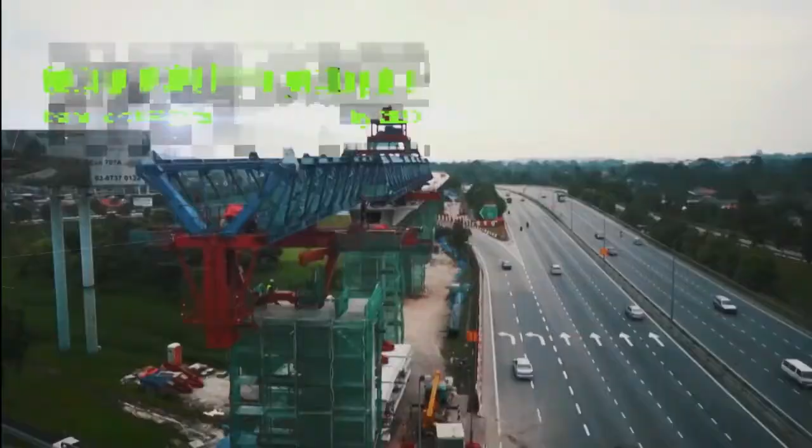Beyond connecting citizens and visitors in the Klang Valley region, Malaysia's Mass Rapid Transit Corporation, or MRTC, is helping transform Kuala Lumpur into a green city.

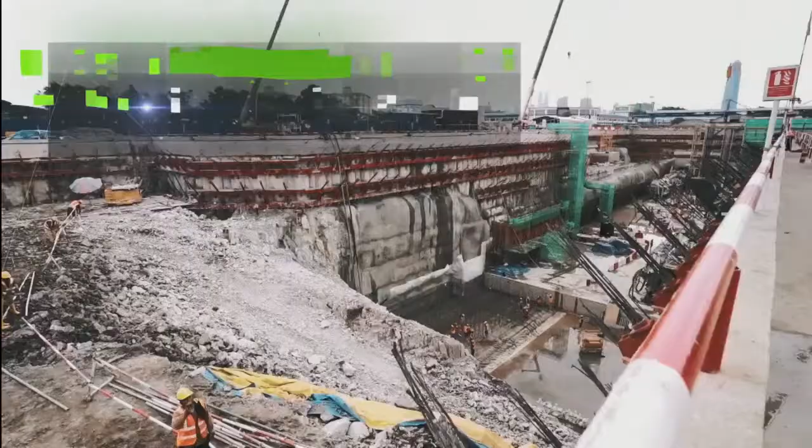Construction of its Klang Valley Mass Rapid Transit project will contribute to a rail-based public transport network within the capital city, as well as new sustainable park and ride facilities and public amenities. The KV MRT system is providing a major boost in the integration and efficiency of urban public transport.

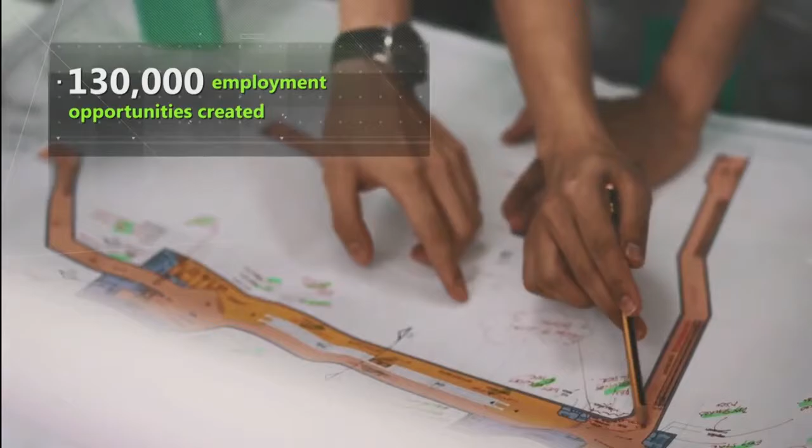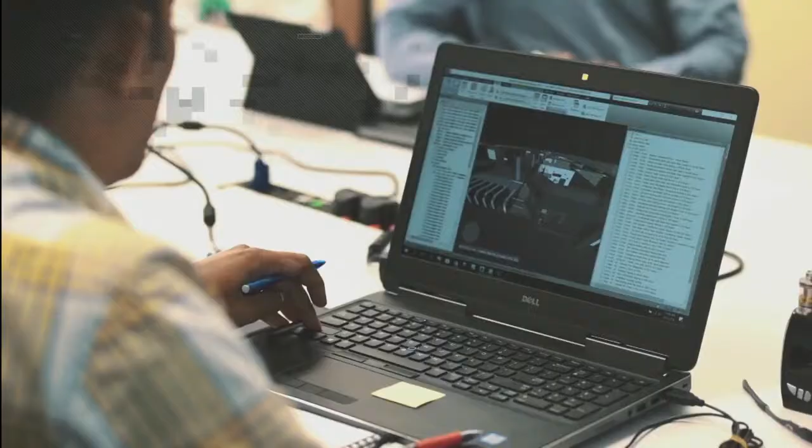The country's largest infrastructure project is already having a significant economic impact in Malaysia and within the region. As the first metro project in Asia Pacific to ensure greater collaboration and efficiency across teams with building information modelling, or BIM methodologies, the SSP line is expected to be delivered on schedule and on budget.

Taking advantage of digital technologies for its SSP line, MRTC is improving connectivity for local and regional businesses, expanding workforce skills, attracting international investment, and increasing property values across the Klang Valley region. Digital transformation is helping transform the lives of millions of Malaysians today in preparation for a better tomorrow.

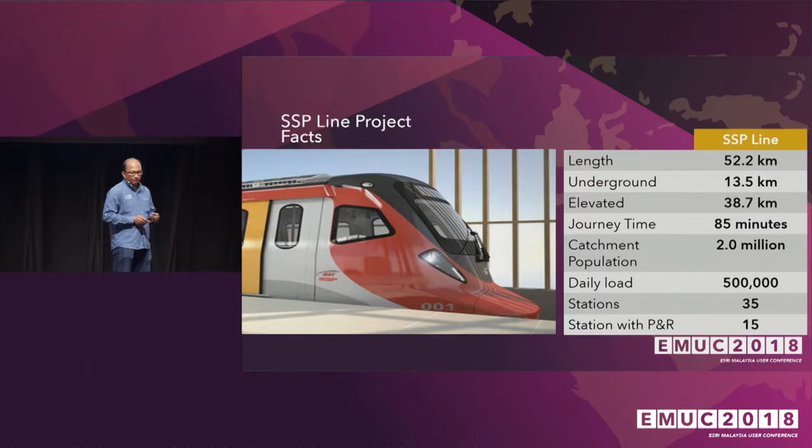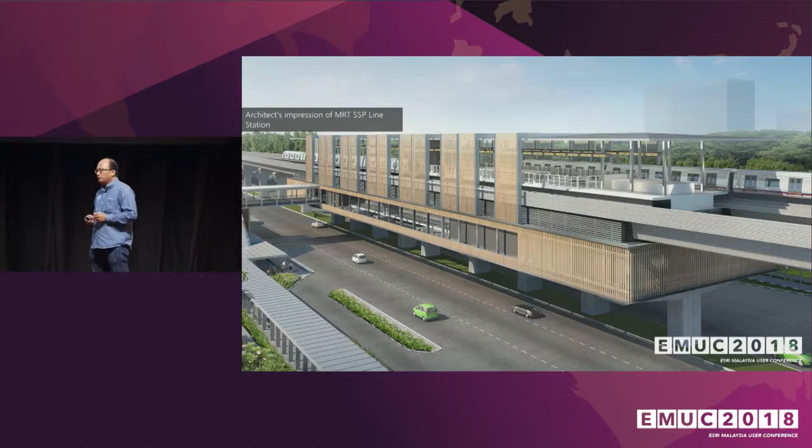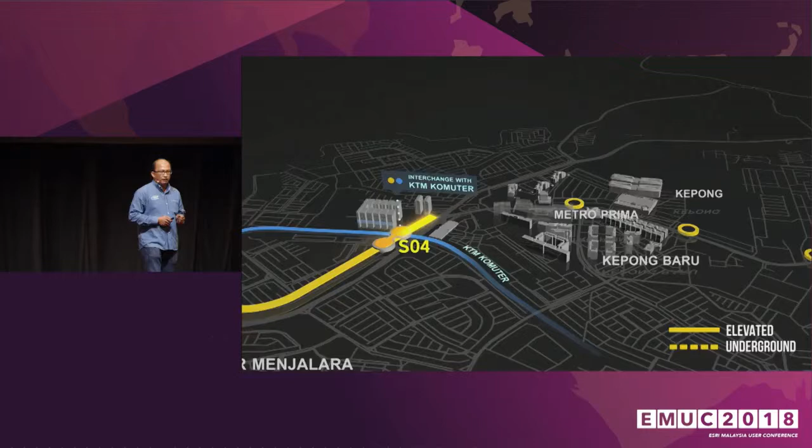The SSP line will start from the existing Sungai Buloh depot and pass through residential areas in the northwest of Klang Valley, including Damansara Damai, Kepong, Jinjang, and Jalan Ipoh.

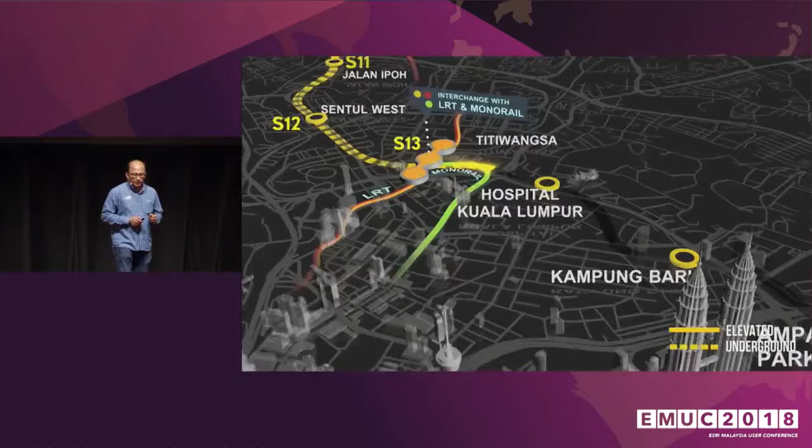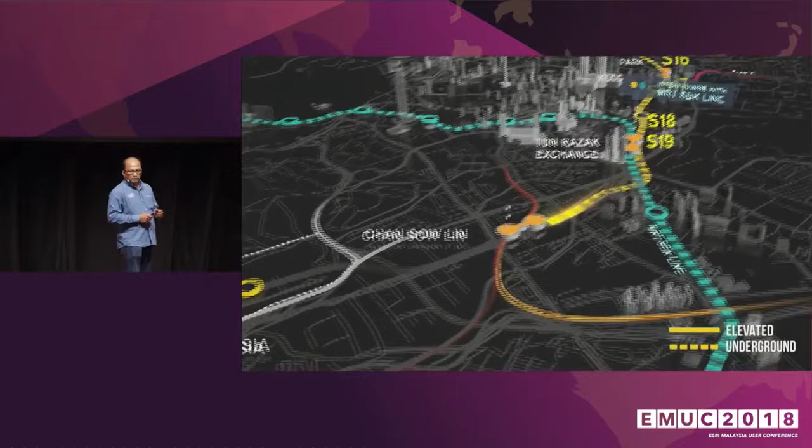Once it reaches the city center, the train will go underground starting from Sentul West, going to Titiwangsa, Kampung Baru, Ampang Park, KLCC, Tun Razak Exchange, Chan Sow Lin, and back to the elevated alignment at Desa Waterpark.

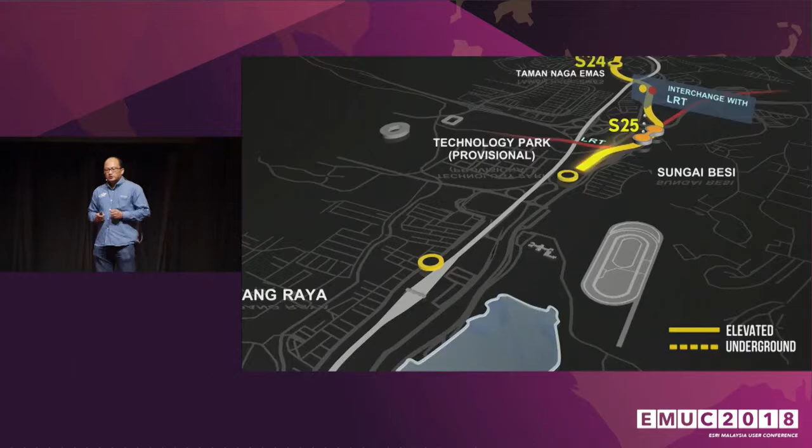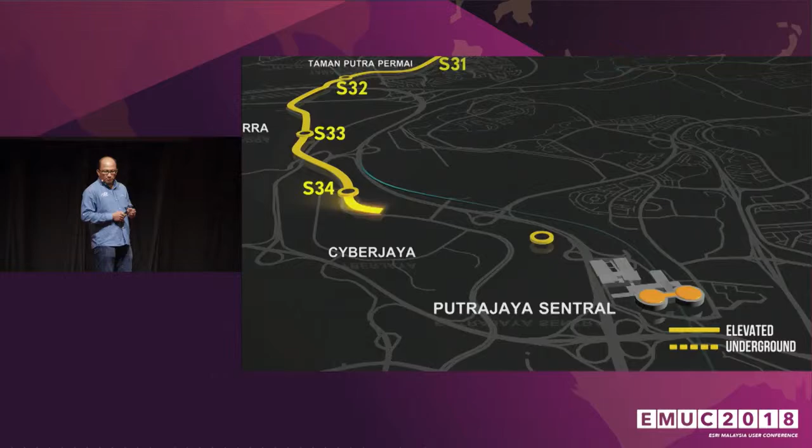Near Jalan Kuchai Lama, the line will continue toward the southeast of Klang Valley, passing through residential areas such as Kuchai Lama, Sungai Besi, UPM, Serdang, our second depot at Serdang, before Equine Park, 16 Sierra, Cyberjaya, before terminating at Putrajaya Sentral.

The project has reached 40% progress of the underground construction and 30% of the elevated system. The operation of the SSP line will be in two phases. Phase 1, from Sungai Buloh station to Kampung Batu station, will begin operation in the second quarter of 2021, while the rest, from Kampung Batu station to Putrajaya Sentral, will be operated under phase 2 in the second quarter of 2022.

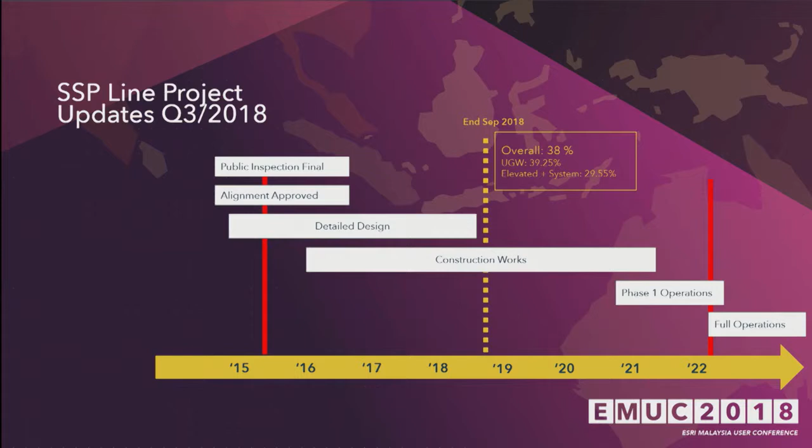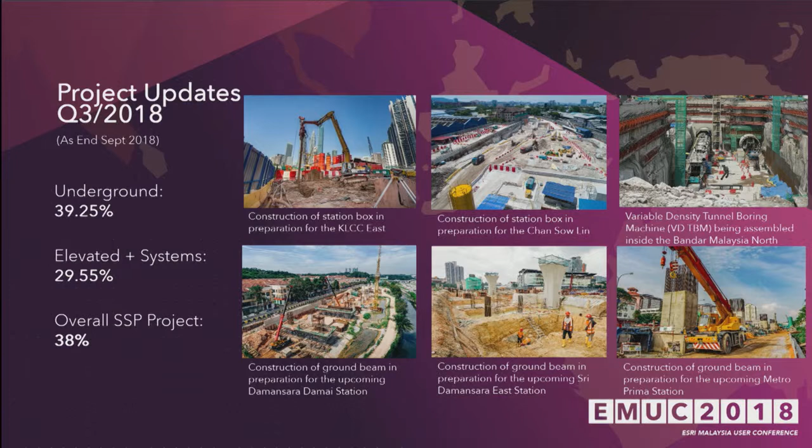These are some photographs of our construction progress. You can see we are currently constructing the MRT station near KLCC, Chan Sow Lin, and our tunnel boring machine launch site at Bandar Malaysia North, as well as some elevated stations at Damansara Damai, Damansara East, and Metro Prima area.

Now, I would like to share some of the project challenges we have in this project. The MRT SSP line consists of 500 multidisciplinary professionals like architects, engineers, planners, geologists, and controllers, and these people are the heart of the MRT SSP line project. We are responsible for delivering the SSP line project within budget and within time to the government of Malaysia.

Our work involved in the design and the construction of the SSP line underground, elevated guideways, depot, tunnels, and station, as well as the electrical and mechanical system required for a fully functional railway system.

It is very important for us to make the information available across the project accurately, up to date, and with no misinterpretation between the stakeholders. We need to ensure the design information, as-built information, and as-built validation are being managed and kept within the project, as the MRT structures and station will have a long lifespan, which is 120 years.

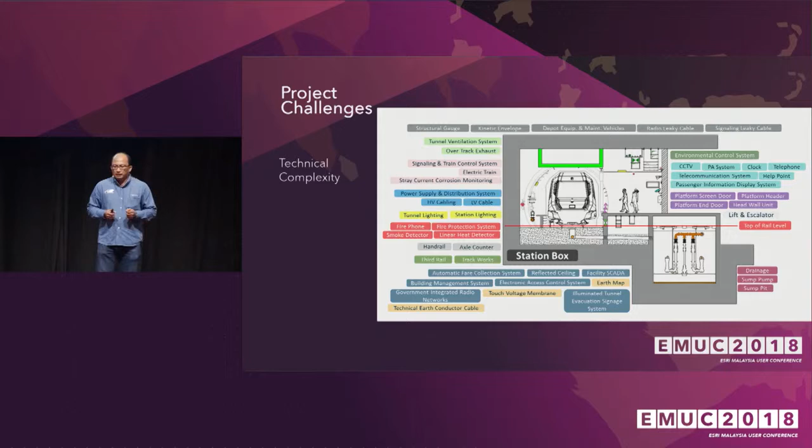Next is the technical complexity of the design. This illustration shows how complex it is to design and construct the MRT station. This involves cross-functional and multidisciplinary fields within a tight schedule. The engineering design information needs to be organized in a systematic and structured way so that it is easy to retrieve. The attributes also need to be updated correctly according to project classification requirements.

To overcome these challenges, MRT Corp has embarked on a digital transformation program for engineering design and construction for this project.

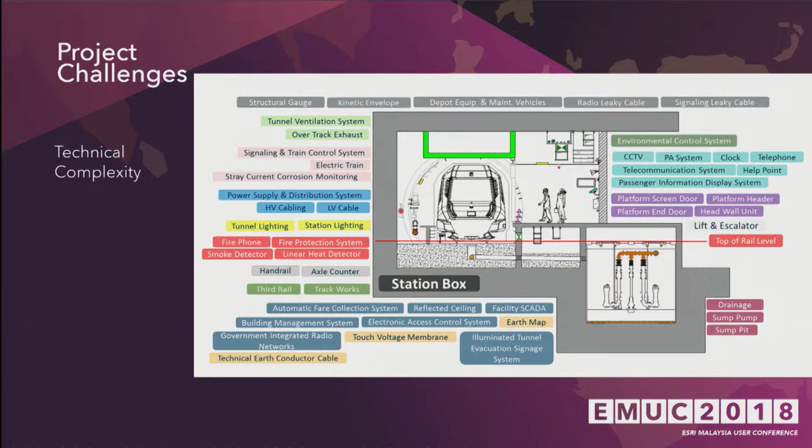The main objective of our digital engineering program is to improve the SSP line project productivity by 35%. In order for us to achieve this, we are pushing 6 digital engineering initiatives into our project.

We are mandating the use of BIM Level 2 framework for our underground and system work package contractor to carry out design process in the Common Data Environment, or CDE, following BS 1192 standard.

We developed a GIS web portal to host all design and engineering information, utilities, as-built and construction models. We also utilize reality models using drones for site progress and monitoring, and we are using 3D laser scanning for BIM model validation and as-built scanning.

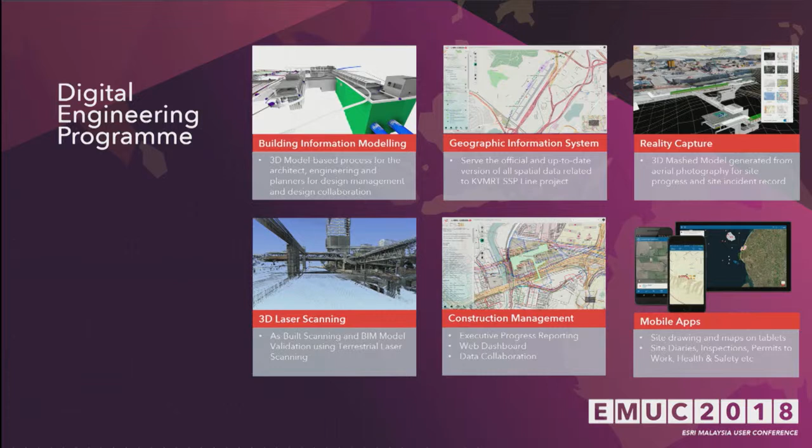Together with our contractor, we are pushing construction management towards going paperless, mainly for inspection, dashboard reporting, and progress updates using smart apps. Next, I would like to showcase some of our work on how we have applied digital engineering in the design and construction of the MRT-SSP Line project.

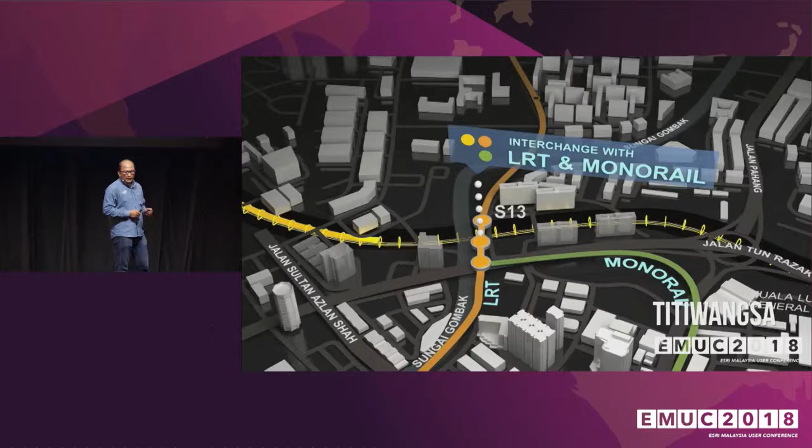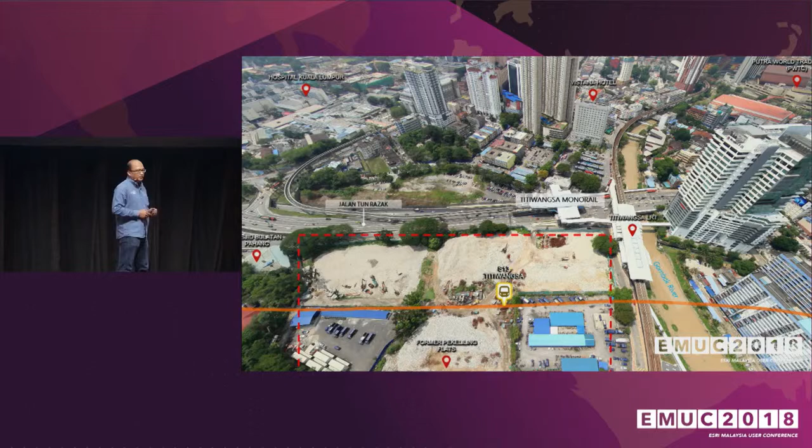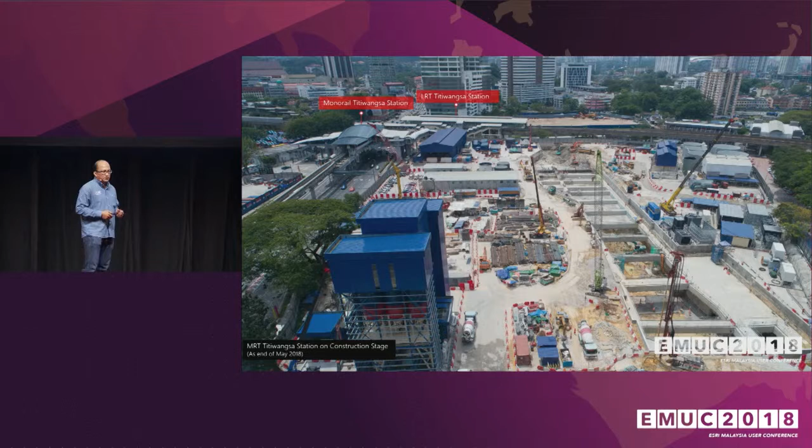For this demo, we have picked MRT Titiwangsa Station, which is one of our favorite stations. The MRT station is located beside Jalan Tun Razak, near the existing LRT Titiwangsa Station and KL Monorail Titiwangsa Station. The MRT station is intended to be an interchange station that will be integrated seamlessly with the Ampang Line and KL Monorail Line.

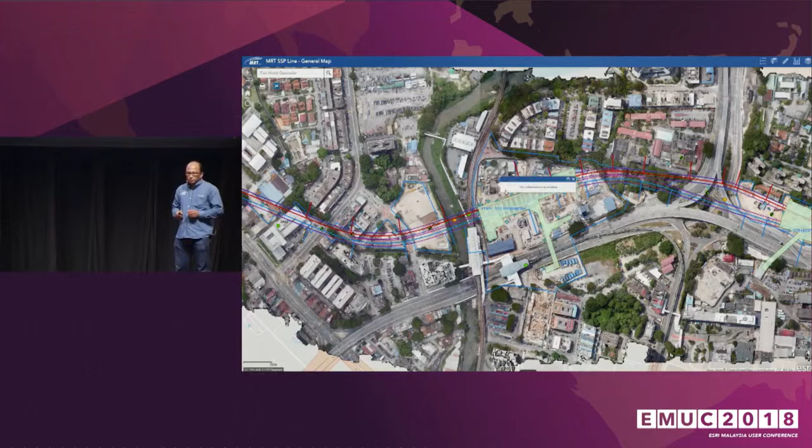Now, let's have a look at the GIS implementation in the MRT-SSP Line project. For this project, our geospatial portal is using ArcGIS Enterprise 10.5. We are currently compiling all engineering drawings, spatial information, documents and records into a centralized mapping viewer.

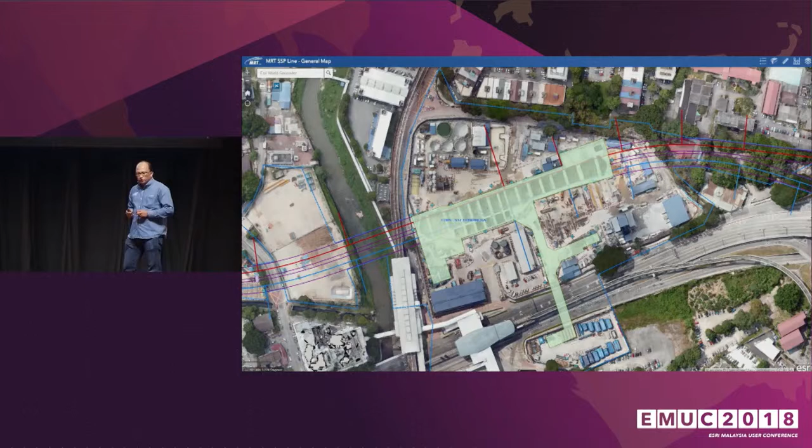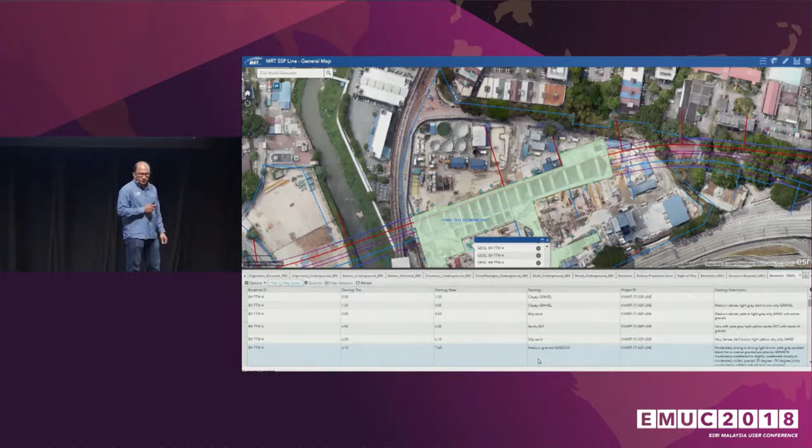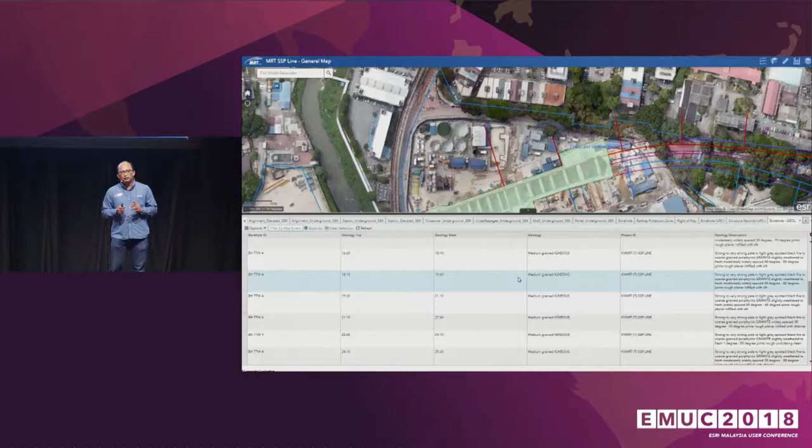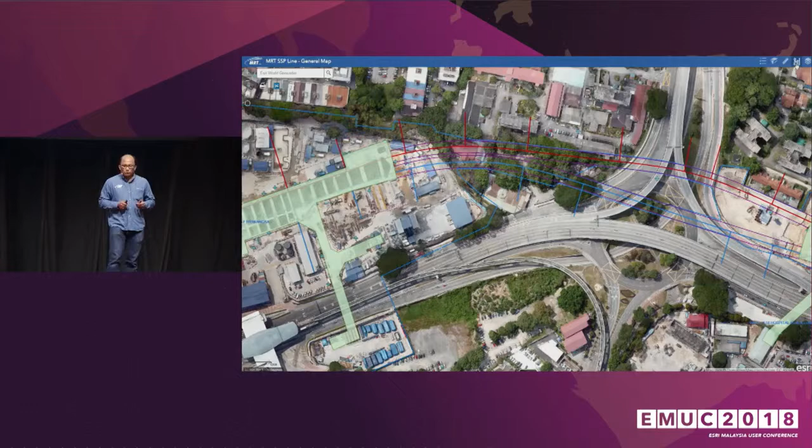The video shows a collection of soil investigation boreholes that we have converted from AGS4 format from our geotechnical team. The AGS4 is a text-based format and it contains detailed information about soil profile. In order for us to bring this data into a GIS portal, a special conversion tool has been developed. Now our geotechnical engineers have the ability to see the borehole report together with the visual representation.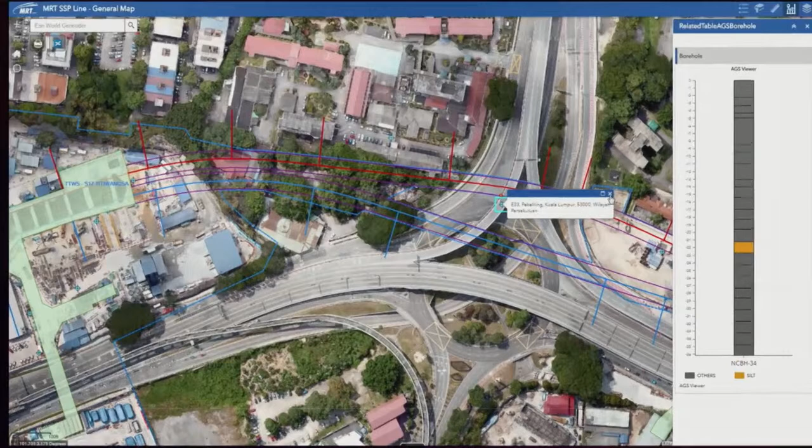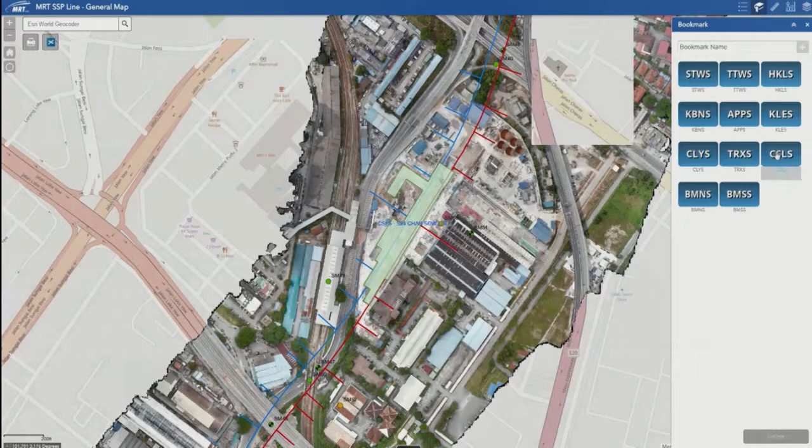We also create a widget to highlight the depth and the soil type of each borehole. It will provide a graphical representation of the soil depth. Here is the video of a few boreholes in the customized widget viewer that highlights the soil profile and the soil depth in the ArcGIS portal.

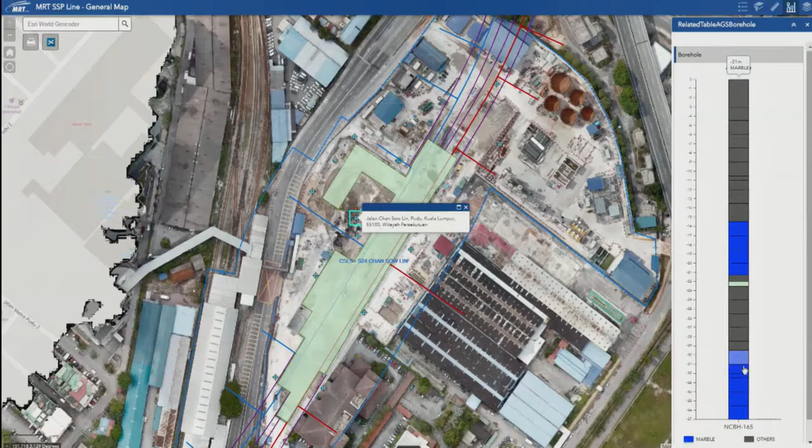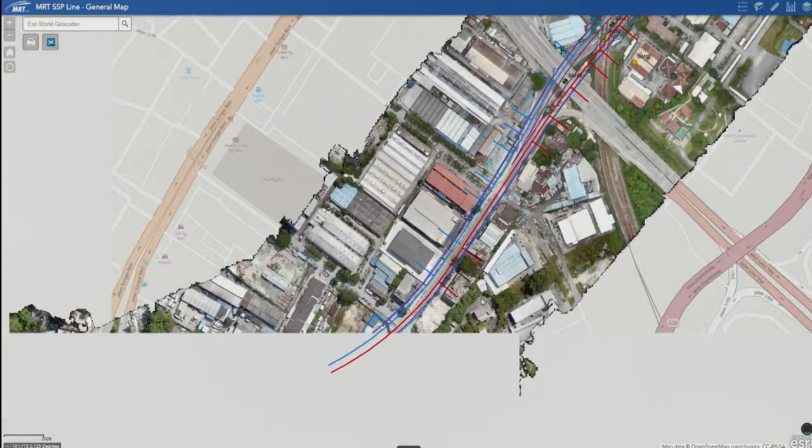In addition to the compilation and presentation of the geotechnical data, we also created an API to interface with Maxwell Geosystems tunneling software. The purpose of this API is to map the tunnel progress every day in the GIS portal. So you can see here, information like tunnel position and ring progress are being tracked daily in the GIS system.

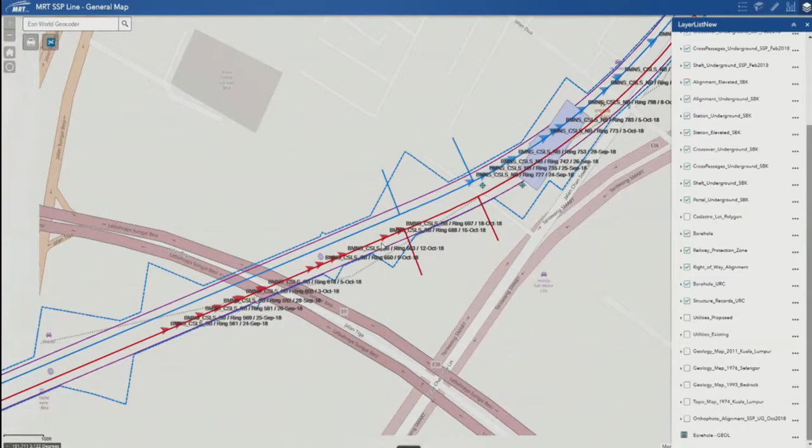For this project, MRT Corp has moved from on-premise server to cloud-based server implementation, which provides better reliability and availability of all our project data. We are adopting Microsoft Azure Cloud for both GIS production and development servers. These servers are fully interfaced with KVMRT CDE, and we are also replicating both servers in cloud and on-premise to backup and protect our project data.

We are also proud to share that we are the first project in the Asia region to have ArcGIS Server Enterprise on full cloud configuration implementation.

Next, I'm going to share things that keep us busy every day, using GIS data with BIM and Reality Model for this project.

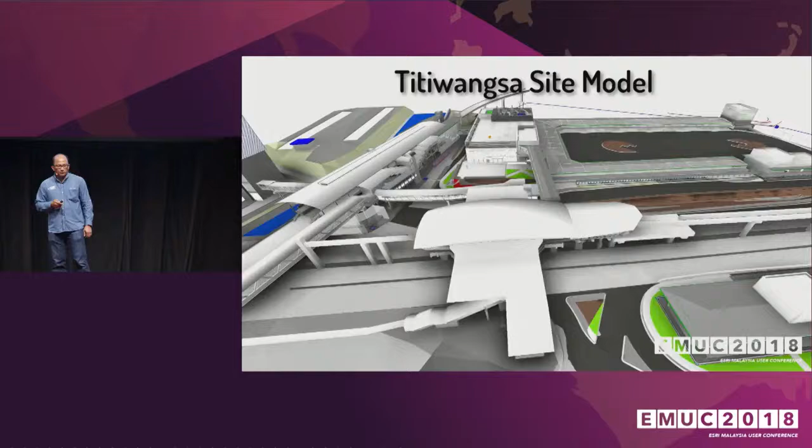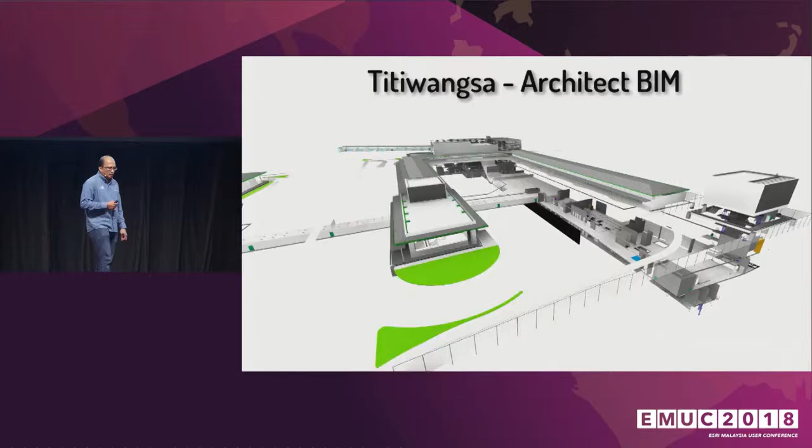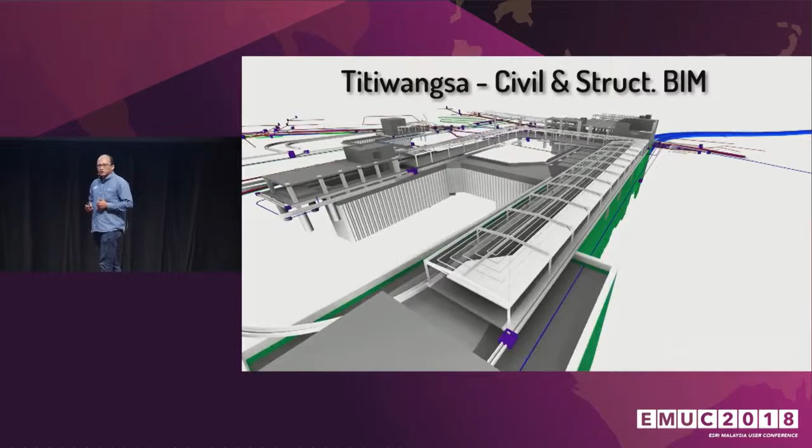The SSP Line is one of the first in the Asia region and among very few in the world to implement BIM Level 2 for an infrastructure project of this scale and complexity. This model demonstrates the station design complexity in 3D, and it allows our engineers to visualize, collaborate, and analyze every aspect of engineering in a virtual world for the design and construction process.

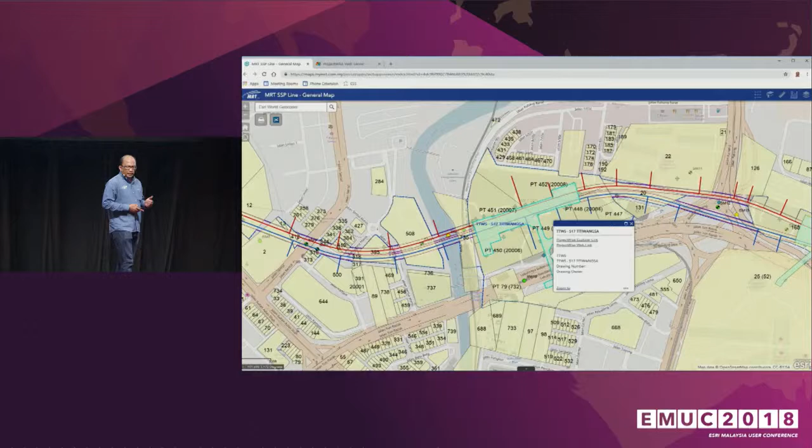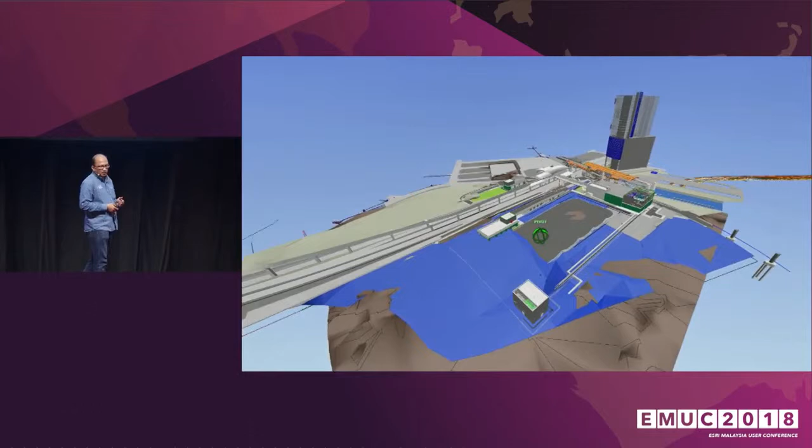To help our engineers retrieve the Titiwangsa model quicker, faster, and more intuitively, we have interfaced our GIS portal with the project CDE infrastructure directly in the cloud. Engineers can retrieve this model directly using a viewer with simplified interface pop-ups and attributes linked to the models using ArcGIS Pro. This is the 3D model being retrieved from ArcGIS Portal in 3D modeling software.

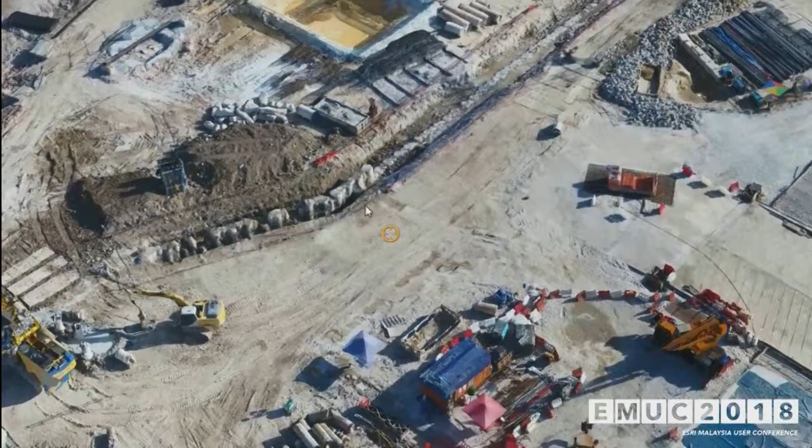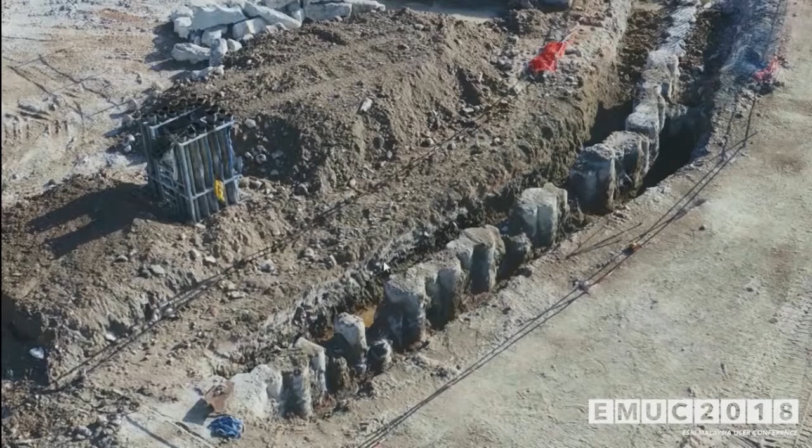We are also pushing the boundaries and setting up benchmarks in various aspects of project development. Among them is the use of reality modeling. Reality modeling is a combination of drone imagery and reality mesh software. These outputs are being used by our engineers to review current progress at site, conduct visual inspection, perform measurement, and review stockpile volume. What you see here is reality modeling of Titiwangsa station and the detailed construction progress.

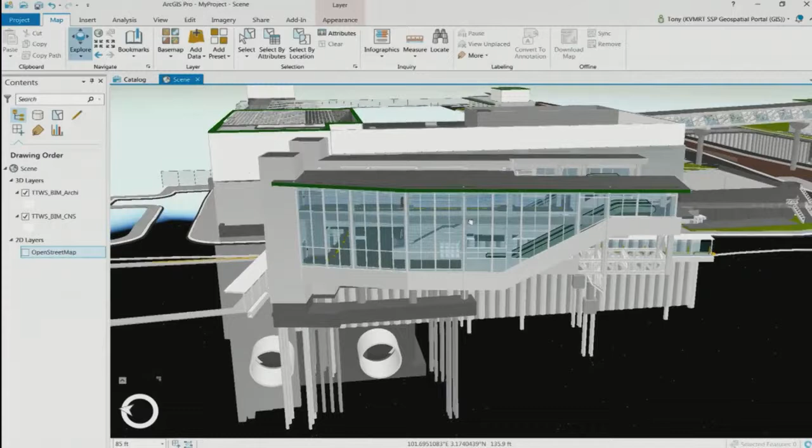We have a monthly program to capture reality modeling for all our underground sites. The scene layer output in Esri i3s format is reviewed, compared, and fused with the BIM model in ArcGIS Pro before we publish the unified model into the 3D scene viewer. This video shows the monthly routine by our GIS engineer reviewing the construction progress using the BIM model and the latest reality model in ArcGIS Pro.

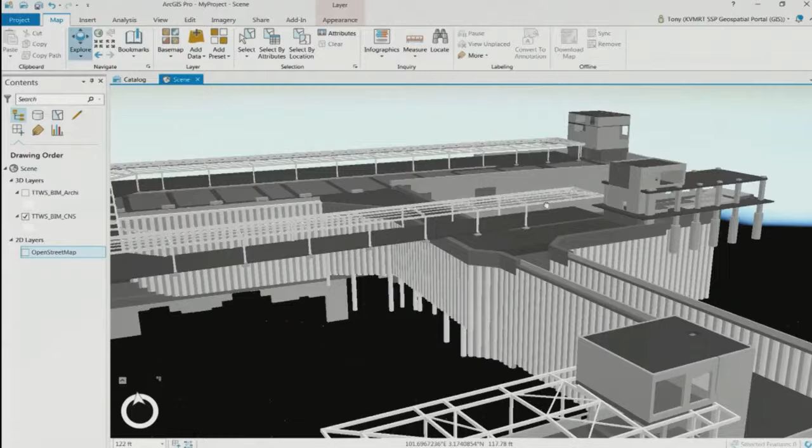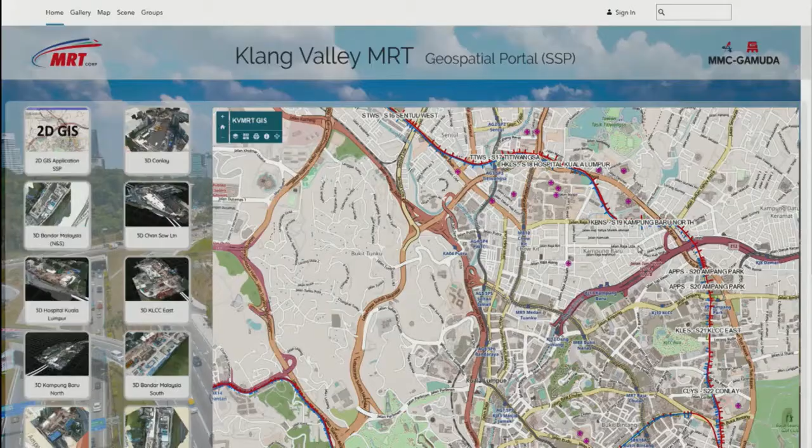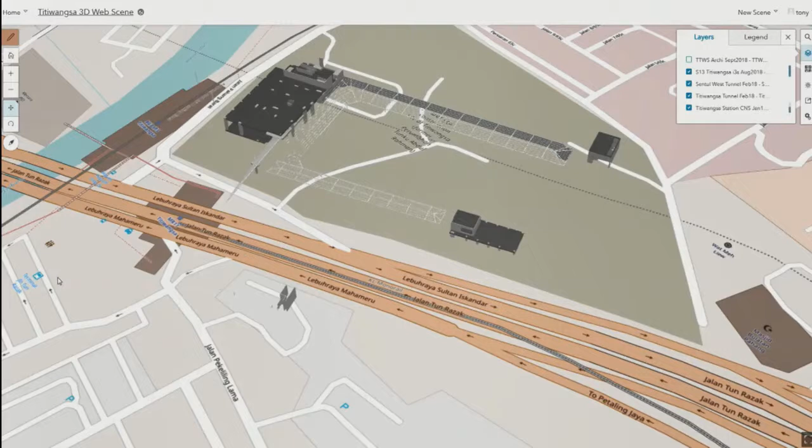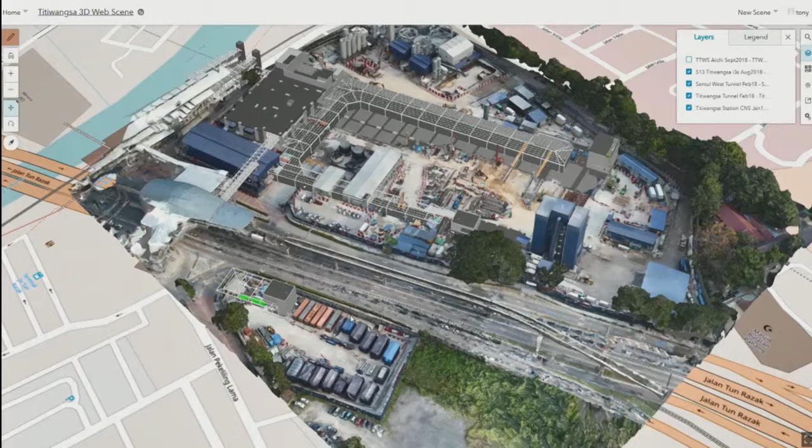Once the 3D model is ready, ArcGIS Pro is able to fuse the models as one unified model before publishing into Esri 3D web scene. We host the unified reality model in our GIS portal for our project team to access and see the site progress virtually on cloud. The 3D web scene enables us to fuse multiple types of information, such as street map, aerial photography, 3D model, and reality model, into a unified 3D viewer.

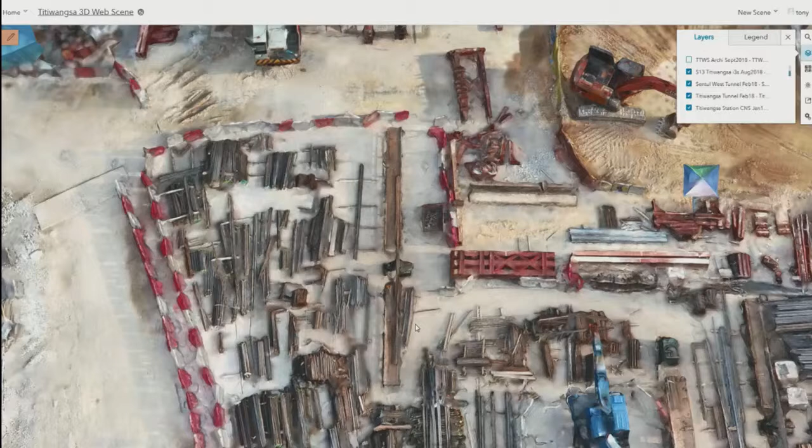Our project manager, site manager, construction manager, and project planner are heavily using this viewer from the site office and design office to understand the site context, review site progress, and inspect site incidents.

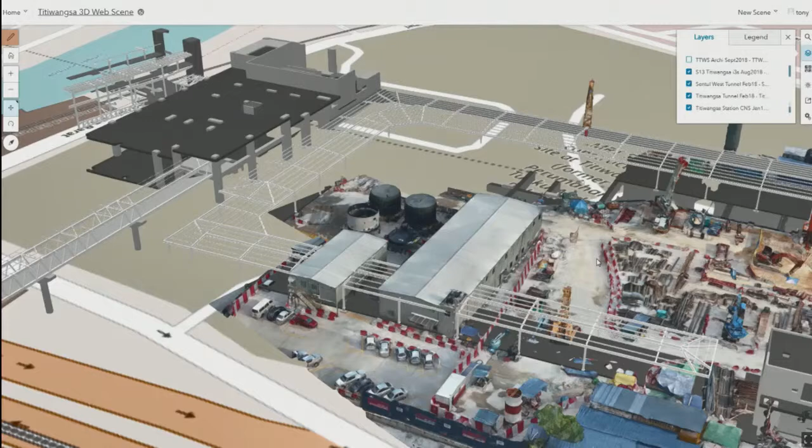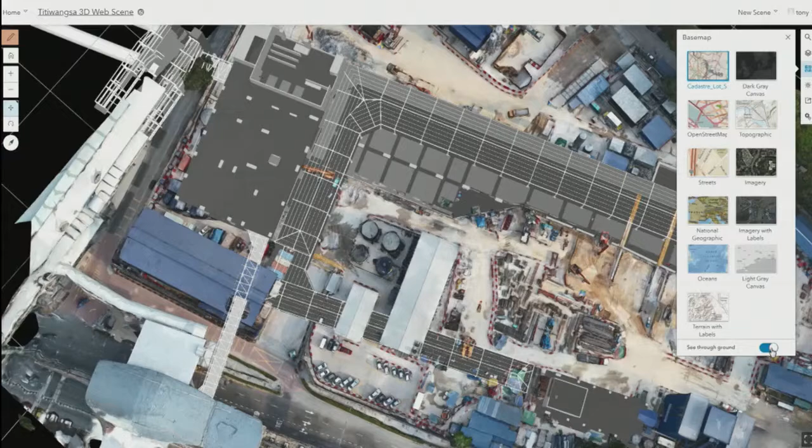On this video, you will see all engineering designs from the BIM model being published into the 3D web scene viewer. The BIM models are the architecture models, structure models, and tunnel models. It is very detailed and very complex.

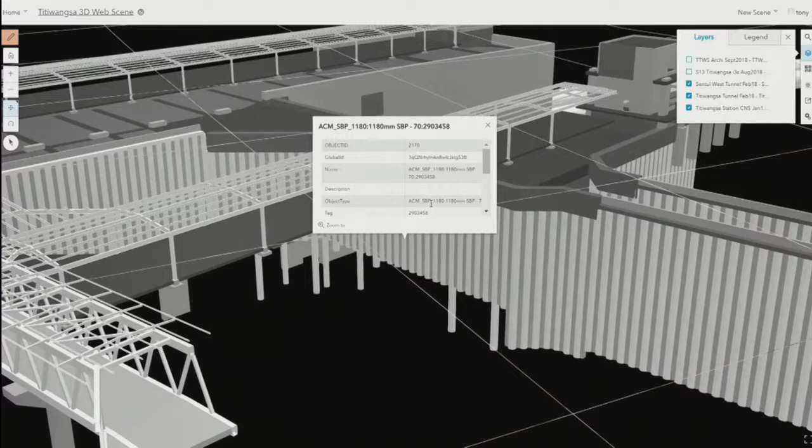Not just models - we also bring the attribute and classification from the BIM model into this viewer. The attributes help our project team understand the full context of their reviews.

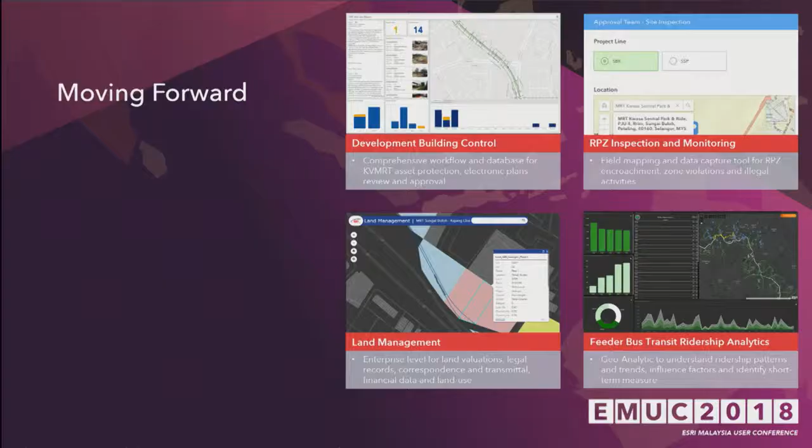Our journey does not end here. We are continuously harnessing the power of ArcGIS technology for our corporate GIS applications. We are currently developing a comprehensive GIS database for our development and building control team, which will contain MRT SSP Line information, engineering drawings, and electronic plans.

We are also testing Collector and Survey123 apps as our field mapping and data capturing tools for our engineers to monitor encroachment, zone violations, and illegal activities in the MRT railway protection zone.

We are also developing a land management database using ArcGIS Enterprise for our land management team to capture all land-related information, valuation, legal records, correspondence, and financial data.

And finally, we are looking at ArcGIS GeoAnalytics to help us understand our feeder bus ridership patterns and trends, and later address our last mile connection issue.

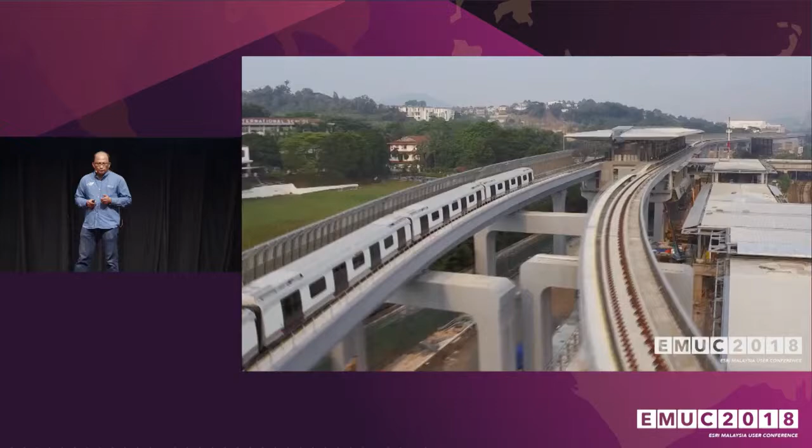Now we have come to the end of the presentation. I hope you have gained new knowledge on how MRT Corp has utilized digital engineering in the SSP Line project. Thank you for your attention, and I look forward to seeing you on board an MRT train soon.